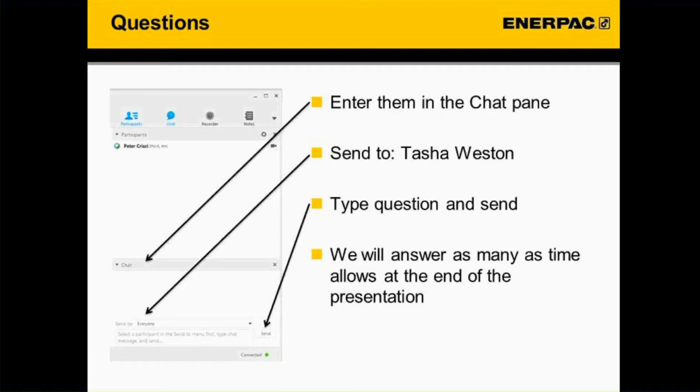As you know, Enerpac is a global market leader in high-pressure hydraulic tools, controlled force products and solutions for precise positioning of heavy loads for a bunch of different applications. We're also here for you when you have specific needs, so we can supply custom products and solutions to meet those unique needs.

Today is an example of some of the training we have for our distributors. We also have our Enerpac Academy service and sales training, on-site product training, as well as bolting vans.

So we have a wide range of offerings. First today we'll cover our standard offering, so we'll go over the C-clamp, Arbor, bench, H-frame, and roll frame press, and then we'll go into our custom capabilities.

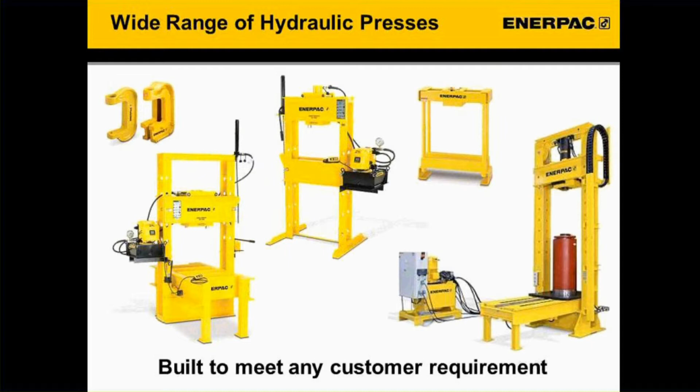First off, we have our C-clamp. It's an open frame that can be positioned around an object that needs to be pressed, shown right here. On the other side, we have our Arbor presses. They also have a C-frame, but these can be mounted vertically or horizontally, for example on a workbench.

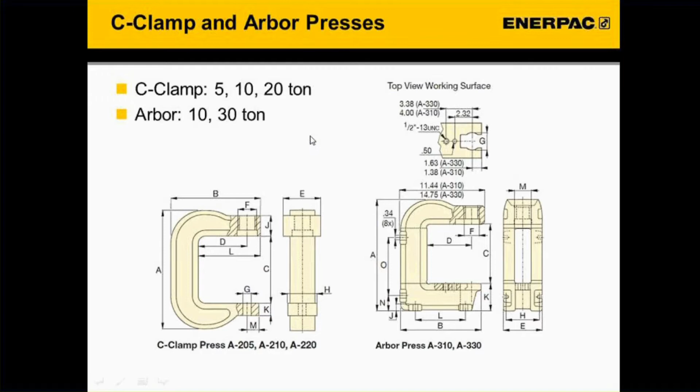For our C-clamp, it can come in 5, 10, or 20-ton presses, and for the Arbor press, it's standard for them to come in 10 or 30 tons. Here are some examples of applications for the C-clamp and Arbor press. You can see the open frame allows you to use it for a bunch of different applications.

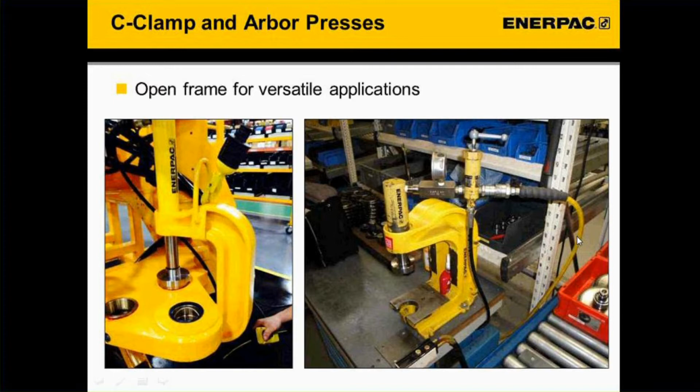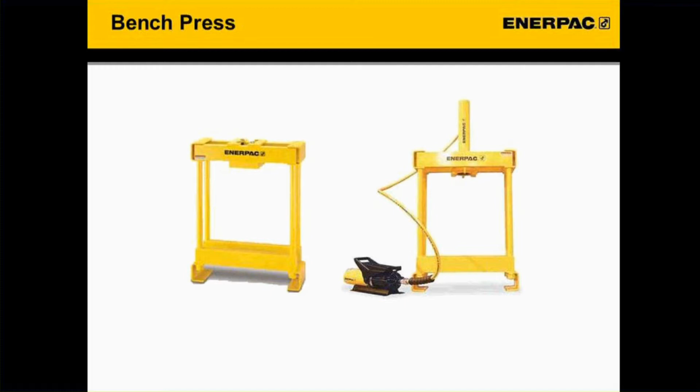Next we'll cover the bench press. It has 10-ton capacity only. It's a bench-top mounted fixed frame press, used with our RC 10-ton cylinders. We have two different sets for bench presses, and as noted, they're both 10 tons. The difference is whether you want an air pump or a hand pump.

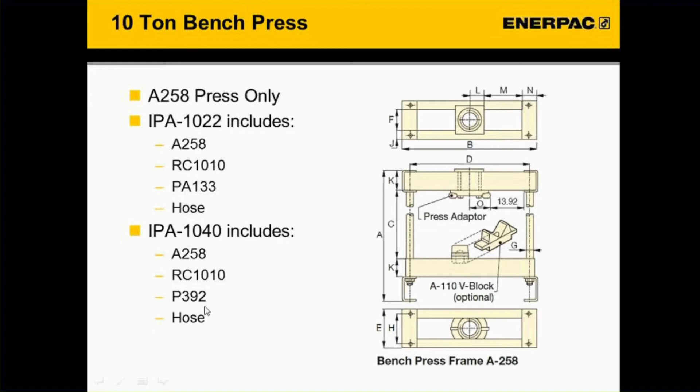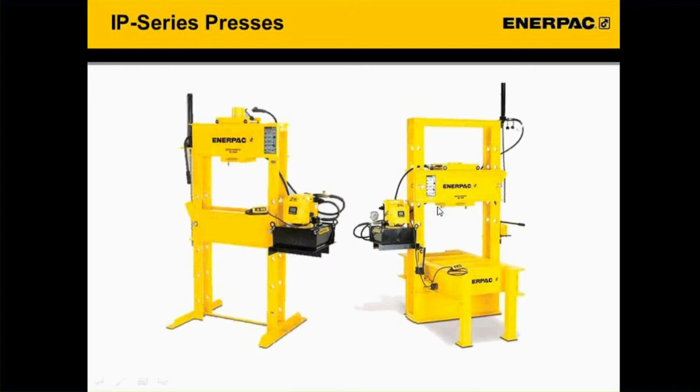Now we'll move into our industrial presses, the IP series, which includes our H-frame and roll frame press. For our H-frame press, the standard sizes are 10, 25, 30, 50, 100, 150, and 200 tons. These can be ordered standard or custom configured, which we'll go over in a bit.

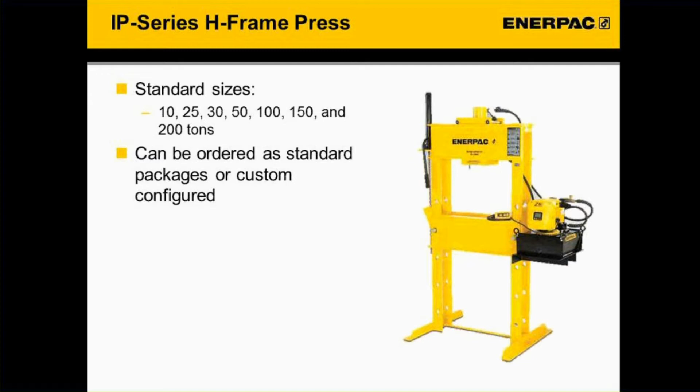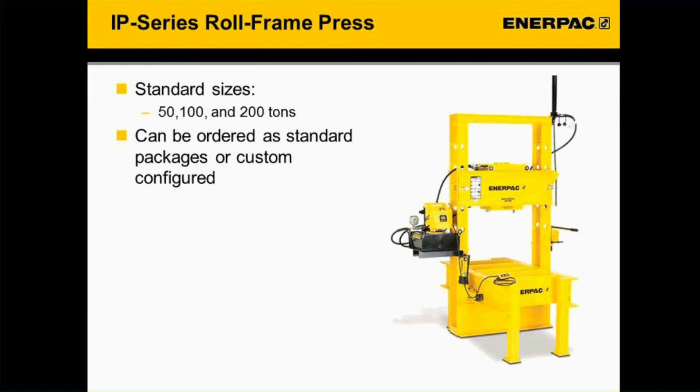Next we have our roll frame press. This one has a bit less range for standard sizes: 50, 100, and 200 tons. Same thing, it can be ordered standard or custom configured. Some of the benefits of the roll frame press are that you're able to place the load down and then roll the frame over on top of the load. The bench stays stationary, but you're able to move the frame back and forth.

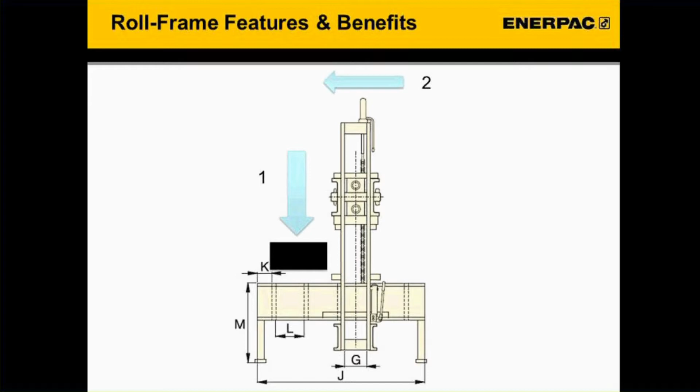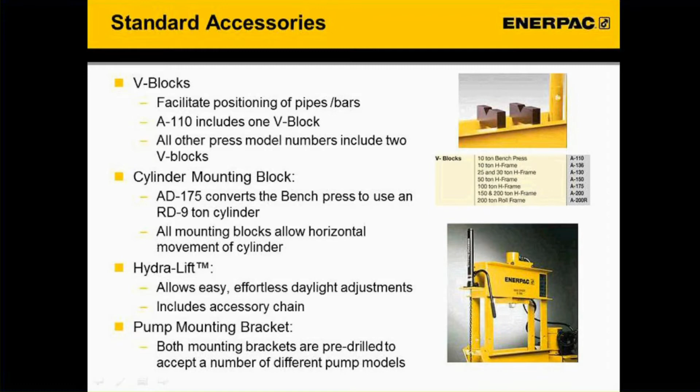Within the catalog, you can see how to configure a custom press to your needs. That will include the cylinder, while the pump is typically ordered separately. You can see a breakdown where the first part is the product type, for example IP for an industrial press, and the second is the frame type.

For this example, it can be H for H-frame or R for roll frame. Third is the press capacity. Fourth is the cylinder type, whether single or double acting. Fifth is the cylinder stroke. And sixth is the optional part if you want to include a pump mounting kit.

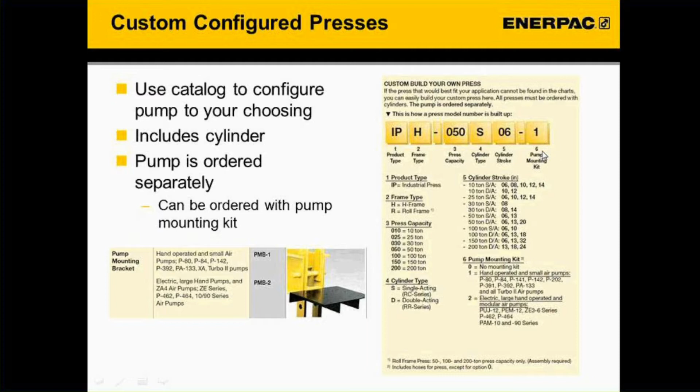So now that we've covered our standard offering and our custom configured offering, we'll go into our more custom capabilities. I'll cover the custom capabilities.

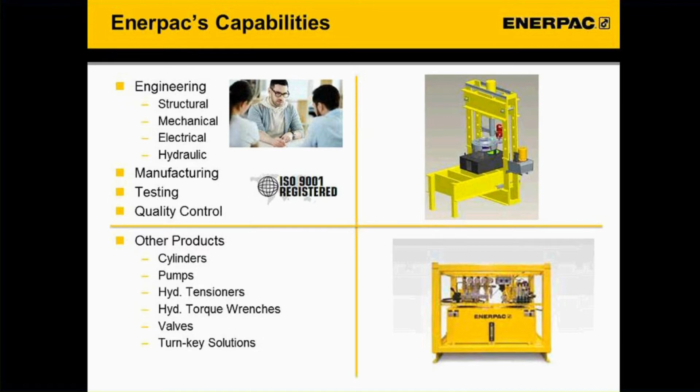Generally speaking, at Enerpac, in-house we have capabilities to do quite a few different custom products aside from presses. You can do cylinders, pumps, bolting products, and complete turnkey solutions. In-house capabilities we have from an engineering standpoint are structural design, mechanical engineering, electrical, and hydraulic. We do in-house manufacturing, testing, and have full quality control on all our custom presses.

One of the many requests we get on custom presses, aside from adjusting daylights and capacities, are safety and automation. These are areas that we can accommodate customers with different controls options, be it as simple as two-hand anti-tie down, but we can also do full PLC controls with touch screen interface and also wireless controls.

We've done automated part positioning systems and sensing, as well as guarding, custom power units with valve banks to actuate all the different components of the press, and also custom cylinders if, for example, the press will require embedded stroke or load sensing capabilities in the cylinder itself.

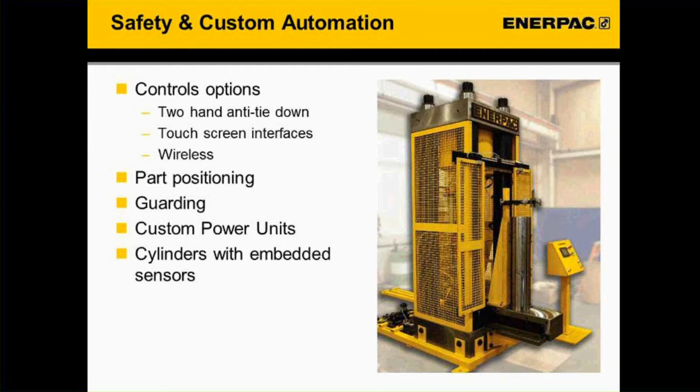Aside from our standard press offering, we just wanted to give you a little bit of an overview of some examples of different custom presses we've done, in hopes that helps generate some ideas for you and your customers.

This particular press is one we did for Rockwell Automation. It was in combination with our sister company, Milwaukee Cylinder, who makes NFPA-style tie rod cylinders. You can see that hanging at the top of the press. Basically, it's a much larger H-frame press with 80 inches of vertical daylight, and the cylinder has about 5 feet of stroke.

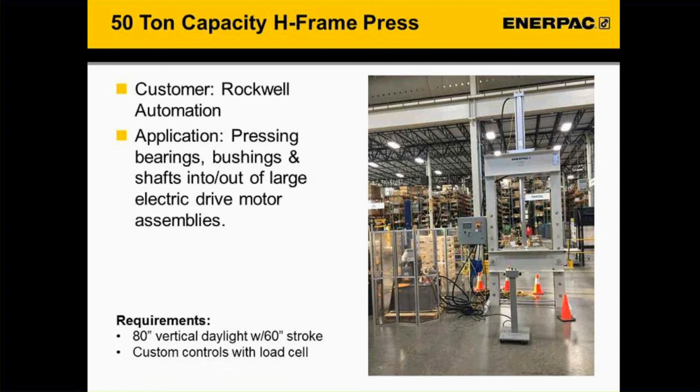It has custom load cells, custom power unit, and controls. You can see the control box off to the left of the press there. And off in front of the press, you can see a little pedestal where the operator can actuate it with two-hand anti-tie down buttons. Primary use for this press is pressing in bearings, bushings, basically doing maintenance on an assembly of large electric motors.

Next press, this is for a customer called FMC. They're in the offshore oil and gas industry. They needed a press to be able to assemble these large valve components, and basically it looks like a cylinder. That's the orange thing sitting on the press there, but it has 2 very large coil springs. This was primarily driven from a safety need.

So the operator can set the valve body on that black table, load the coil springs and then the gland at the top, and then the controls actually shuttle the part forward underneath the press, and then the press head can be adjusted down. What's kind of unique about this one is that cylinder, and you can kind of see it there in black. It's a 100-ton capacity cylinder, and it has an automatic mechanical locking feature.

So it has an Acme thread on the cylinder rod and a gear-driven lock nut. So as the cylinder is pressing the spring down, it has a lock nut that's constantly spinning. So in the event of some type of hydraulic failure, everything is held mechanically in place and the spring force is contained.

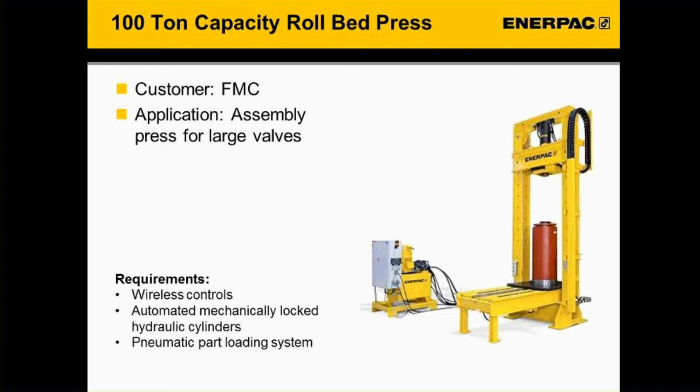Once it's pressed down, the operator has the ability to get over there and turn the gland nut down. So everything on this particular project was custom, from the press to the cylinder, the power unit, and the controls. That one also happened to have a wireless control system as well.

This press is a custom roll frame press. Customer needed added capacity, so even though our standard roll frame presses go up to 200 tons, this is an example of what a 300-ton capacity roll frame press would look like. So dimensionally, it's got a very long bed. This particular customer, General Tool, was using it to straighten out large fabrications.

Because the press is so large, typically the roll frame press has a lot of the actuation of the press components done manually, but in this case we needed to add automation. So towards the front of the bed there, you can see an electric drive motor. There's a large Acme screw thread. It's a big mechanical actuator. So with electric controls, you can drive the frame of the press along the press bed.

If you can see by the cylinder itself, there's a horizontal black line, it looks like. That's also a mechanical actuator, and that's to adjust the cylinder from left to right on the press frame. And then the operator can basically move the press where needed and then actuate the cylinder to do the straightening operation.

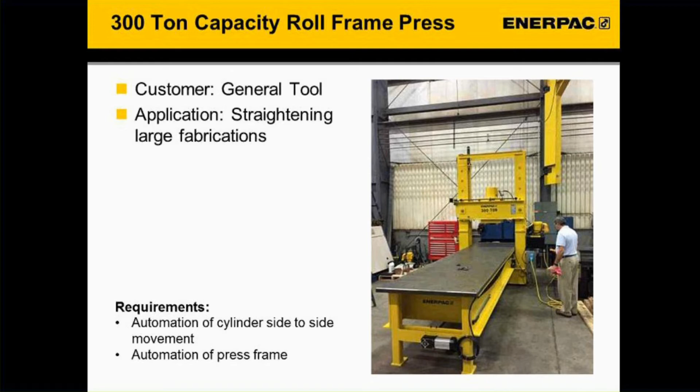Next one is a C-frame press, where a customer needed to punch some holes. They had a large order. Customer's name is Fabricated Metal Products, where they had to basically punch 3 holes in this steel tube channel. And how they were doing it is with 3 different operations and drilling those holes, but because they had to do so many, they needed a more efficient option.

So what we did was come up with a punch press that could basically punch 3 holes in one. Also has a guide system on there, so the tube can be slid over the punch press, and then the guide would center the tube underneath the presses. The whole thing was hung from a counterbalance device to lighten the load so the operator could handle it manually.

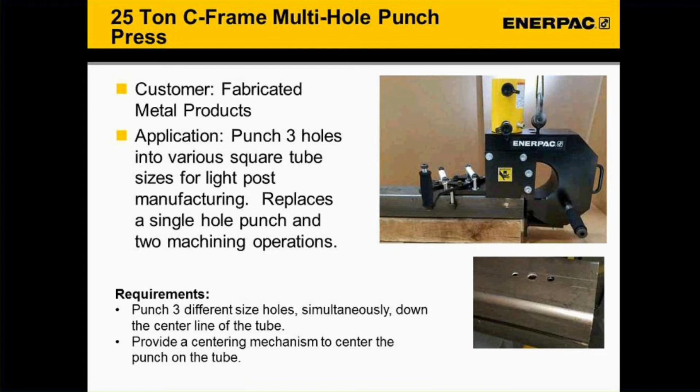Next press, this is another custom press. It kind of started off as a 200-ton H-frame press. It got much wider. This was for the University of Pittsburgh, and they're basically using it to test a fracking operation. So they have a 1 foot by 1 foot, basically a cube of granite, and they would frack it with the hydraulics and have a high visibility dye within the granite to determine kind of the best possible angle for the fracture to travel through the natural fissures of the granite.

So kind of a unique operation, weird looking press, but you basically had 5 200-ton cylinders. So in each of those, it looks like a structure inside the press. You can see on the back end those 4 holes. That's the back end of the cylinder. So each of those has a cylinder, plus the top of the press has a cylinder in it as well.

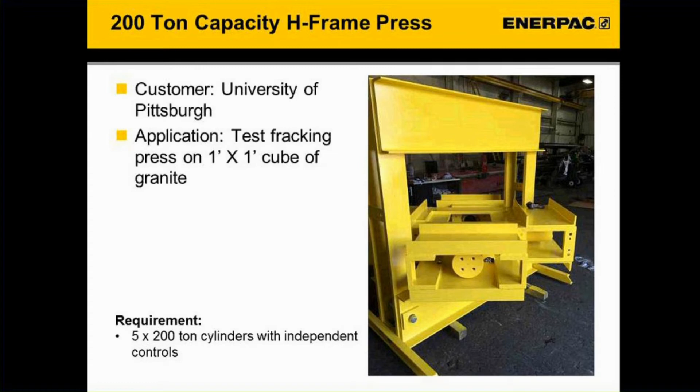The next one, this is for Caterpillar, also another unique press application. Caterpillar uses these large, they call them cartridges. You can see it loaded in the press there. And these are basically the pin joints for their bucket loaders. So how these pin joints are assembled is you have a solid pin. They come in different lengths, so the press had to accommodate different heights, and you can see a small holding bracket there. They would build it up to the height, and then each pin would have a collar slipped over the top of it, and there's seals between the collars.

And then how the operation worked is the operator would start the cycle. The collar would shuttle underneath the press. The press had a large 1,500-ton capacity custom cylinder with only about 2 inches of stroke. There was a laser in there, and the laser would take a measurement at the top of that collar. The cylinder would come down and press that whole pin structure and then release it. And basically what would happen is they would compress it in the elastic limit of the pin.

When the pin relaxed, it would pull those steel collars out a little bit. And there was a certain tolerance they had to hold, and it was within 0.5 millimeter. So the laser would take another reading, and when that collar moved 0.5 millimeter, then the part was considered good. It could come out of the press. So the guarding doors were actuated, the part loading was actuated. We did all the controls along with the laser, and it's a large 4-post press. Very tall. It's about 15 feet tall, and they use this in their assembly plant.

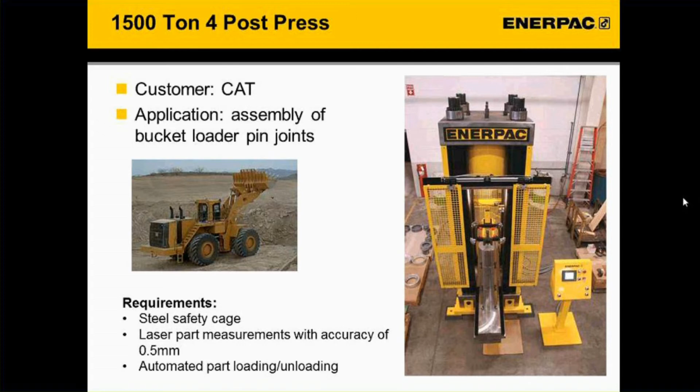Another one is for a company called All-Clad. They make cookware, and they needed a very high capacity press used in a lamination process for making their cookware. So what you see here, it's got 4 large links with pins and a custom cylinder, and this cylinder is a 4,000 ton capacity cylinder. I think this is probably one of the largest presses we ever made. It's operated with a large Enerpac 80 series pump. You can kind of see it there in the picture, along with some custom controls.

So this photo was taken... This was fabricated at our facility in the Netherlands, and this photo was taken in our yard where we do all our full load testing for these large structures.

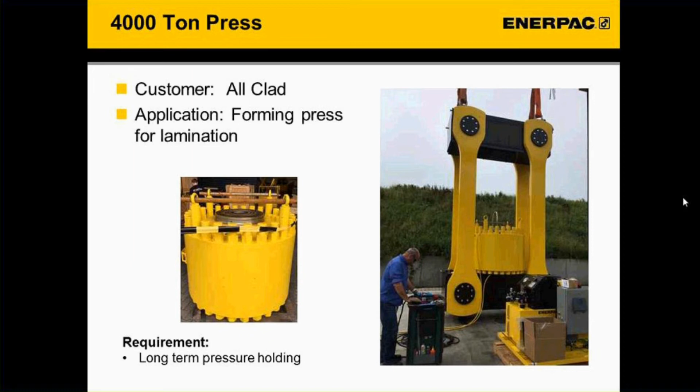Next one is another 300-ton roll frame press. One of the many requests we get for the roll frame presses is because the bed is stationary, the frame has to roll along the bed. In standard configuration, that frame is a manual operation. So it rides on some bearings, and the operator grabs the frame and basically pulls it or pushes it along the press bed to position it. Once the operator has the frame where they want it, they can operate some hydraulic jacks that lock the frame in place, and then you can press with the main pressing cylinder.

Simple manual valve, and basically the carriage that rides along that rodless air cylinder is positioned between the uprights of the press frame. So as that carriage moves forward or back, it basically pulls or pushes the press frame along the bed, and it's just a kind of a simple modification that makes it more ergonomic to use the presses.

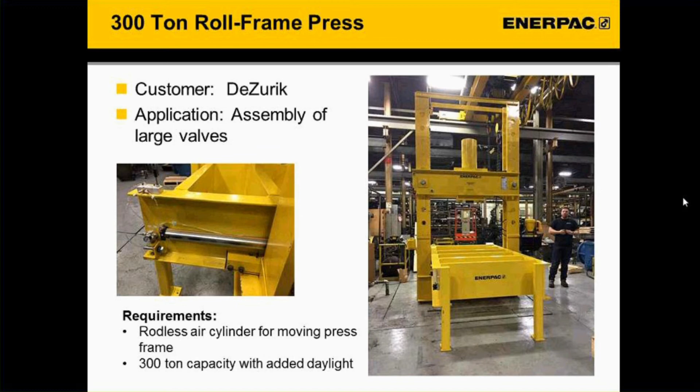Our sister company, as I mentioned earlier, is Milwaukee Cylinder. Milwaukee Cylinder specializes in NFPA-style tie rod cylinders, which are very well suited for high cycle and production applications. One thing we've been starting to do with them is make these special automated type presses for testing, material testing, and also precision assembly.

So one of the things, for example, the travel repeatability is within 0.001 inches. If you look at the force repeatability, we can repeat force within 0.01%. And the velocity of the cylinder can also be controlled within that 0.01%. So, aside from doing large steel structures for assembly or testing type work, we can do some pretty refined, high precision type press work as well.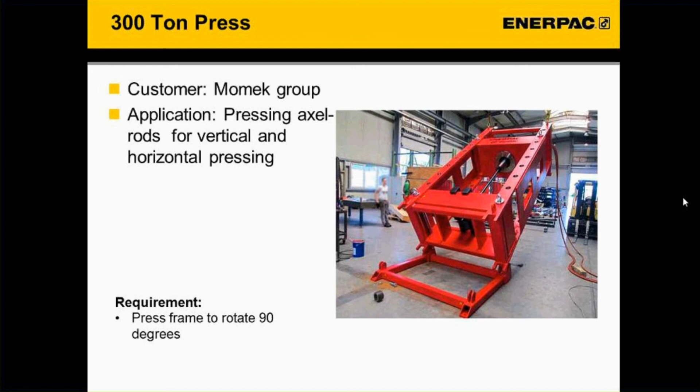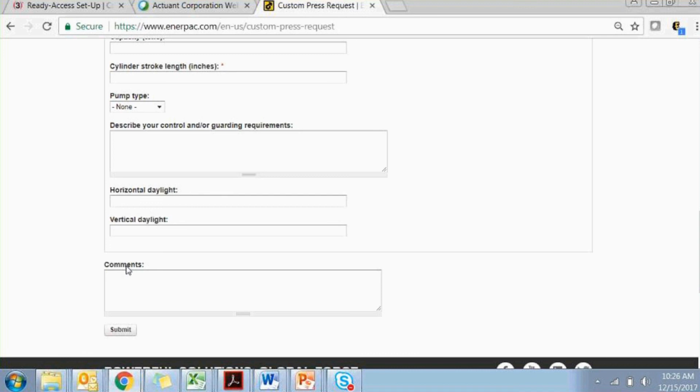So you're able to upload files as well. And then there's some more information that can be added. You can go into control or guarding requirements. And then if there's something up here that you didn't see, feel free to add it into the comments section. And then it gets submitted to our team. We review it and get a quote back to you. So once you submit it, you'll get an email letting you know that it has been submitted appropriately, and that someone from our team will be getting back to you shortly.

So that concludes our webinar on custom presses and our different capabilities.